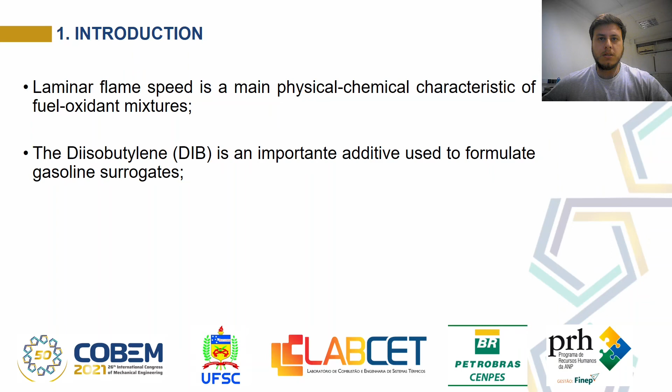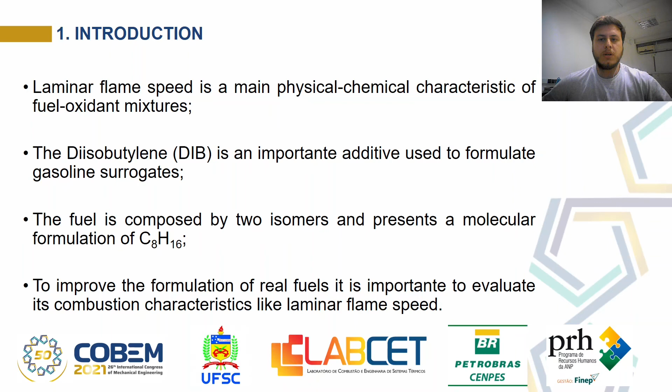Diisobutylene is an important additive used in the formulation of gasoline surrogates. This fuel is composed of two isomers and is a representative of the branched alkenes present in gasoline. For a better comprehension and improvements on gasoline surrogate formulation and development of new fuels, it is important to evaluate its combustion characteristics, like laminar flame speed.

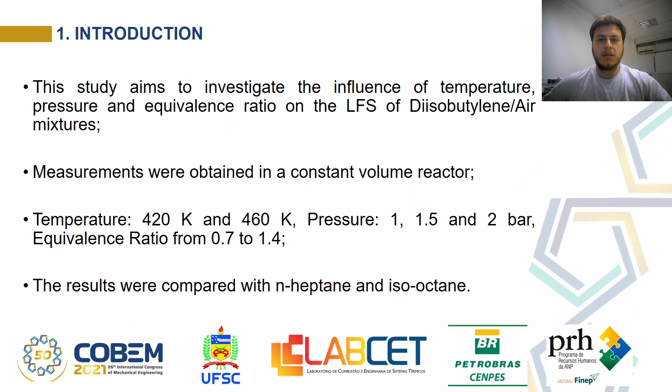In this way, this study aims to investigate the influence of temperature, pressure, and equivalence ratio on the laminar flame speed of diisobutylene-air mixtures. The measurements of this property were obtained in a constant volume reactor installed at the Combustion and Thermal Systems Engineering Laboratory. The conditions used in the experimental tests were temperatures of 420 and 460 Kelvin, pressures of 1, 1.5 and 2 bar, and equivalence ratios from 0.7 to 1.4. The results were compared with n-heptane and isooctane, the primary reference fuels.

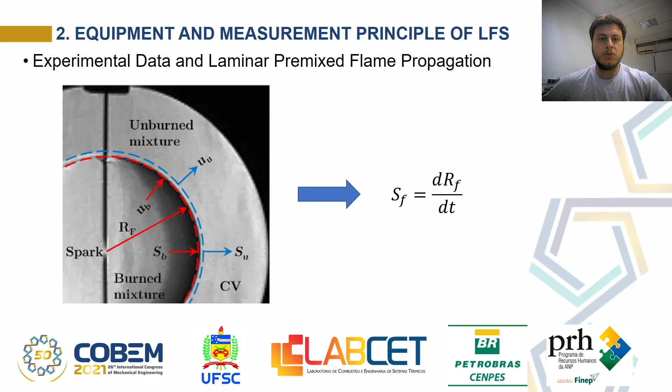In this topic, I will present the concept of experimental result treatment and the calculation of the laminar flame speed. The constant volume reactor is a spherical chamber, and through the treatment of the experimental result, it is possible to obtain the flame radius propagation as a function of time. With the propagation rate of the radius and some assumptions, it is possible to estimate the laminar flame speed using a correlation with the gas density of the burned and unburned mixtures.

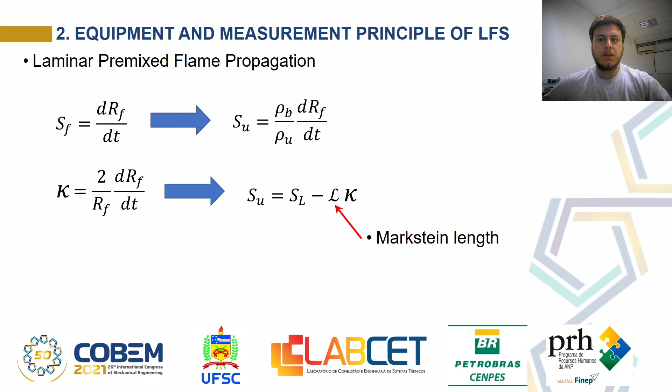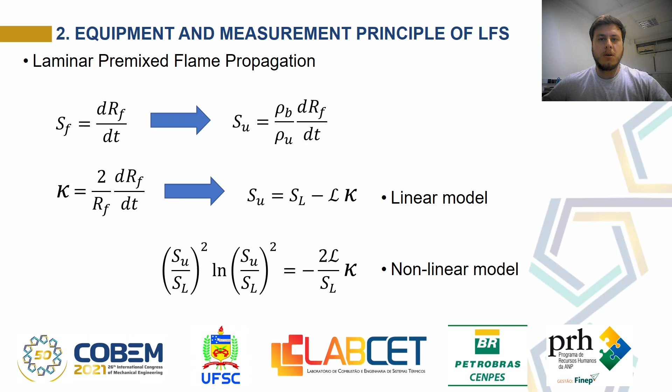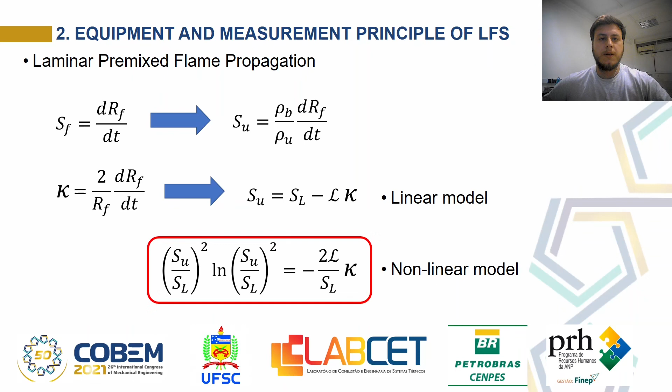Due to the stretch and curvature of the flame, a correction is necessary. The correction can be obtained by the introduction of the stretch rate and using the Markstein length. The laminar flame speed is obtained by fitting the results, obtaining the estimated values for laminar flame speed and Markstein length, and this model is known as the linear model. Kelley and Law proposed a more comprehensive model, known as non-linear, which is also based on fitting the values to obtain the laminar flame speed and Markstein length. In this work, we use the laminar flame speed obtained through this second model.

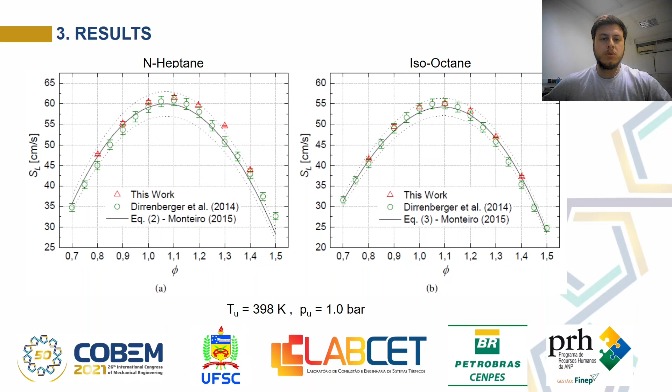Now presenting a comparison of the results of the pressure 1 and 2 bar at the temperature of 420 Kelvin. It can be observed that the laminar flame speed decreased more compared with the results of 1.5 bar. In this comparison, it's observed a decrease of approximately 6 cm per second in the region near stoichiometry and rich mixtures and 3 cm per second at lower values of equivalence ratio.

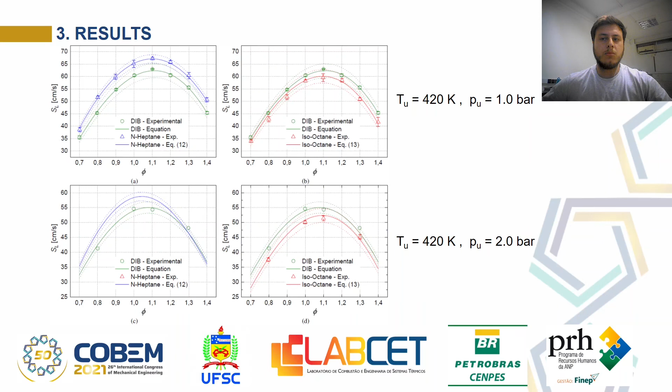The equation to estimate the laminar flame speed of diisobutylene air mixture was fitted using the experimental results for a fixed pressure of 1 bar and temperatures of 420 and 460 Kelvin, and for a fixed temperature of 420 and pressures of 1.5 and 2 bar. The equation obtained is presented here, and it is dependent on the equivalence ratio, temperature and pressure of the unburned mixture.

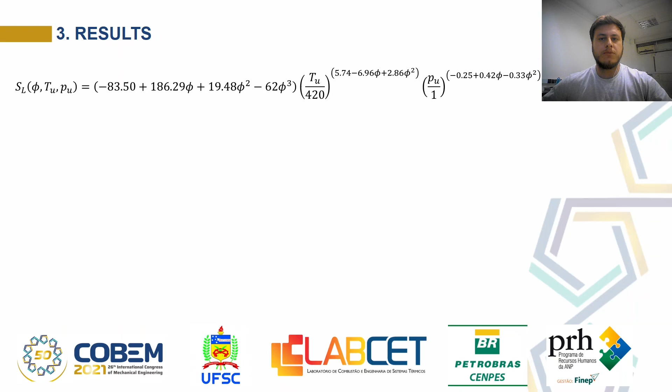Here are presented the estimated and the experimental results in the condition of pressures of 1.5 and 2 bar at temperature of 460 Kelvin, intended to validate the laminar flame speed predicted by the use of the equation. It can be observed a good agreement of the experimental results with the predicted for the pressure of 1.5 bar. At the pressure of 2 bar, the results at the equivalence ratio of 0.8 present a good agreement, but at the equivalence ratio of 1.1, the result is coincident to the upper limit of the equation, and higher equivalence ratios are above this upper limit of the equation.

These tests were developed with no replication due to the availability of the fuel, and to improve the equation coefficients and compare with the experimental results, we expect to develop more tests in the future.

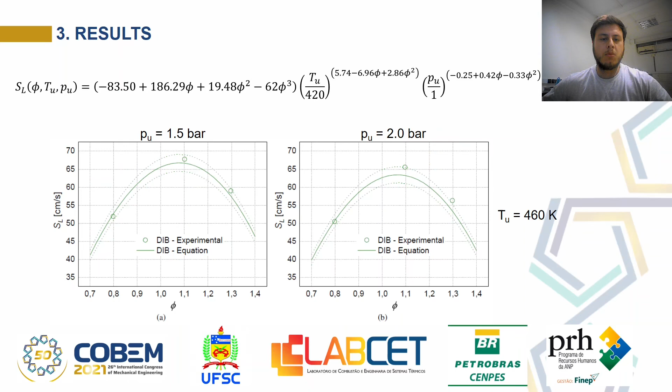Now the conclusion about this work. The preliminary tests demonstrate that the workbench was working properly to develop the tests proposed in this work. The results show that the laminar flame speed increased with the increase in temperature for a fixed pressure, reflecting the temperature influence. In addition, the increase in pressure for a fixed temperature presents the opposite, tending to reduce the laminar flame speed.

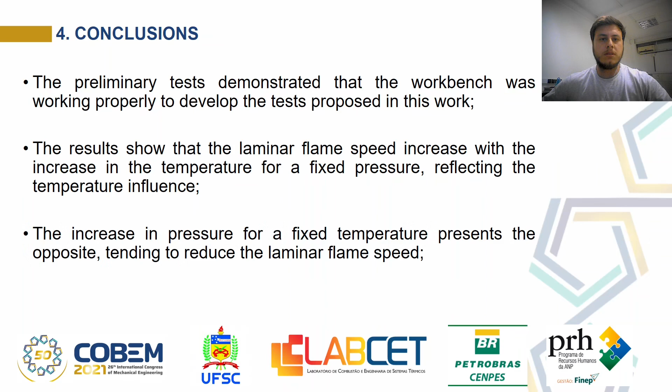The influence of these parameters on the laminar flame speed was observed for all fuels, and the equations obtained with dependence on equivalence ratio, temperature and pressure for the 3 fuels presented a good agreement with the experimental results, especially for the diisobutylene air mixtures. And for future works, the group hopes to develop further tests to improve the equations by replicating the tests and introducing one more temperature.